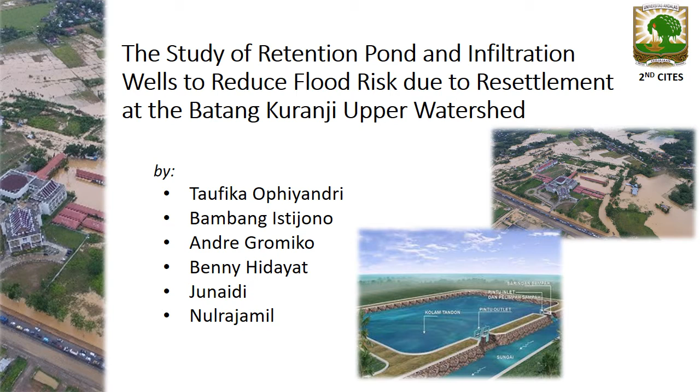This paper was also written by my colleagues, Bapak Bambang Istijono, Bapak Andre Gromiko, Bapak Benny Hidayat, Bapak Junaidi, and Bapak Nulrajamil. I divided this presentation into four sections. First is the introduction, where I will explain the background and objective of the paper, followed by its methodology. After that, we will discuss the result that we obtained from the research, and finally

The background of this paper is that in recent years, the Batang Kuranji watershed has experienced significant development, especially after the earthquake on the 30th of September 2009. Since then, due to tsunami risk, a large number of communities near the coastal area, which is the downstream area of the Batang Kuranji watershed, began to move to the upstream area. As a result, there has been significant change in land cover at the upstream area.

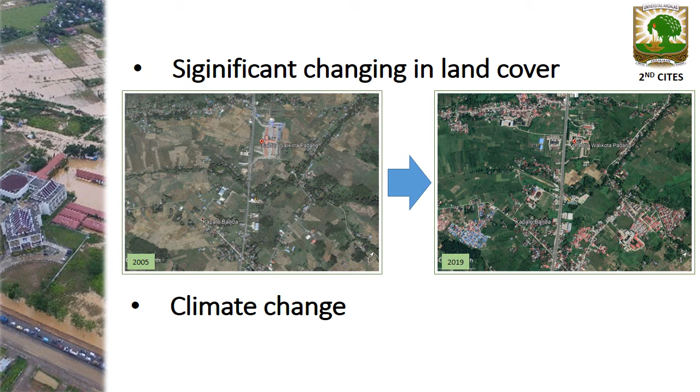As you can see from the left photo, in 2005, the area was mostly rice fields. Buildings were still very rare. But in 2019, due to development of infrastructure such as office buildings, roads, houses, and schools, the green area for water infiltration has reduced significantly. This condition is exacerbated by climate change. Thus, the peak discharge of Batang Kuranji might increase.

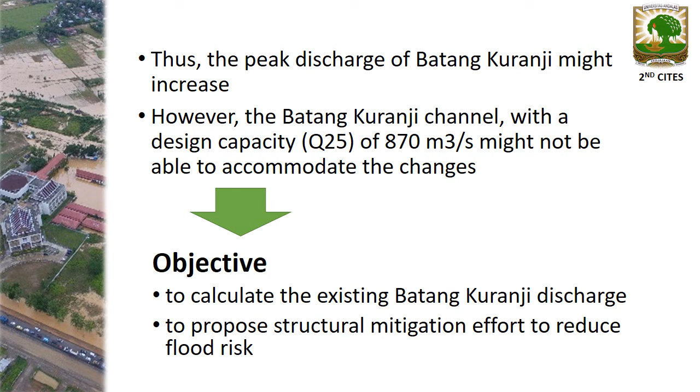However, the Batang Kuranji channel, with a design capacity of 870 cubic meters per second, might not be able to accommodate the changes. So the objective of this paper is to calculate the existing Batang Kuranji discharge and to propose structural mitigation efforts to reduce flood risk.

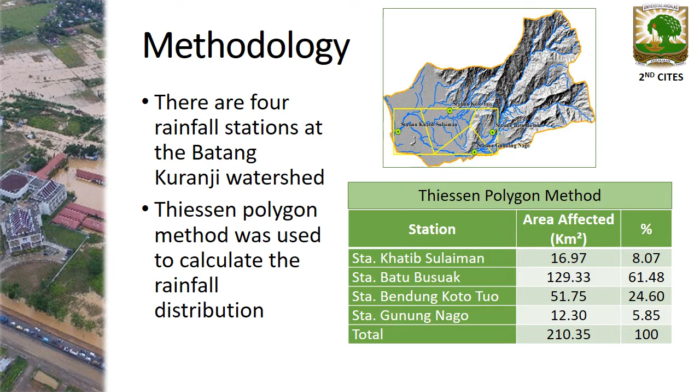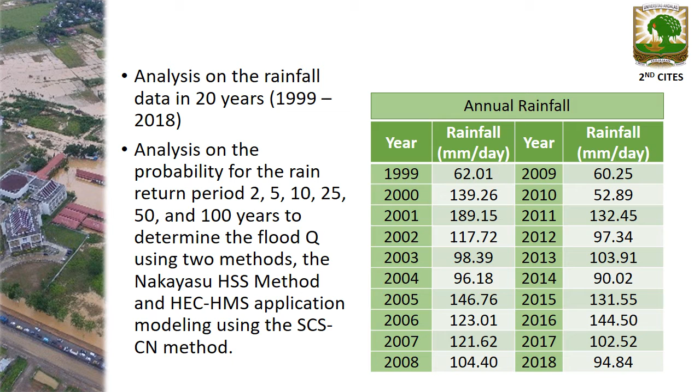The methodology we use for this research is: first, we calculate the rainfall distribution using the Thiessen polygon. From the table on the right, you can see the percentage area of each rainfall station. We conducted the analysis on 20 years of rainfall data, from 1999 to 2018. Then we analyze the probability for rain return periods of 5, 10, 25, 50, and 100 years to determine the flood Q using two methods: the Nakayasu HSS method and HEC-HMS application modeling.

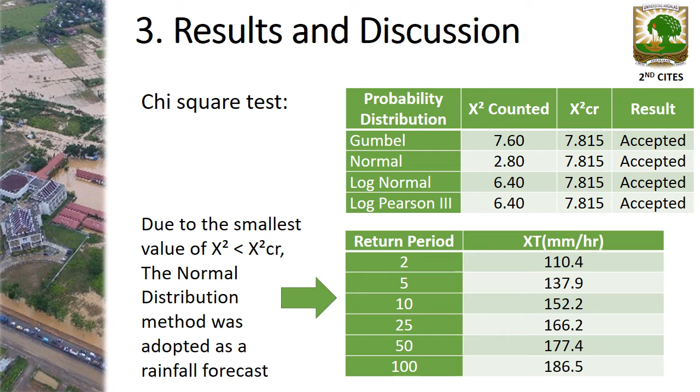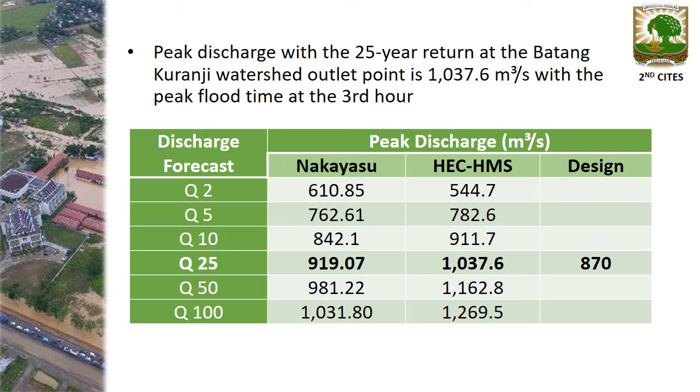So, as the result of the study, we found that normal distribution was the best fit to be adopted as a rainfall forecast. Then, we used two methods, the Nakayasu method and the HEC-HMS method, to calculate the discharge of Batang Kuranji. We found that the peak discharge using the Nakayasu method was 919 cubic meters per second and 1037 cubic meters per second for HEC-HMS, while the design for the Batang Kuranji channel was only 870 cubic meters per second.

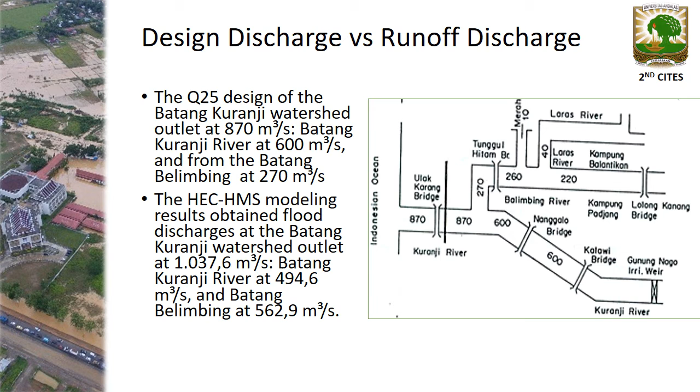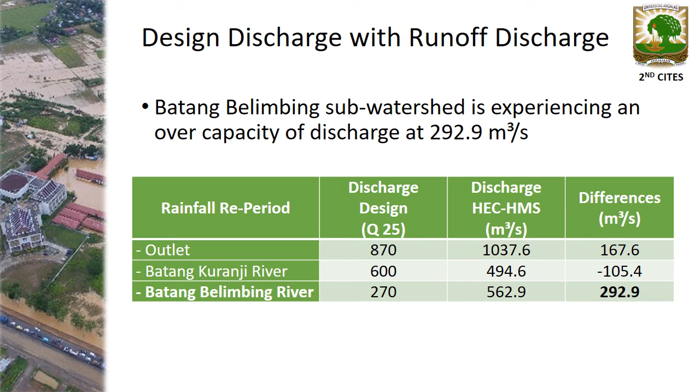So, if we compare the design and runoff in this chart, as can be seen from the picture on the right, the design discharge at the subwatershed is 600 for Batang Kuranji and only 270 for Batang Belimbing. Then, we found that the existing peak discharge at Batang Belimbing was higher than designed. From the table below, we can see that the Batang Belimbing subwatershed is experiencing an overcapacity of discharge of 292.9 cubic meters per second. So, flood risk measures have to be taken.

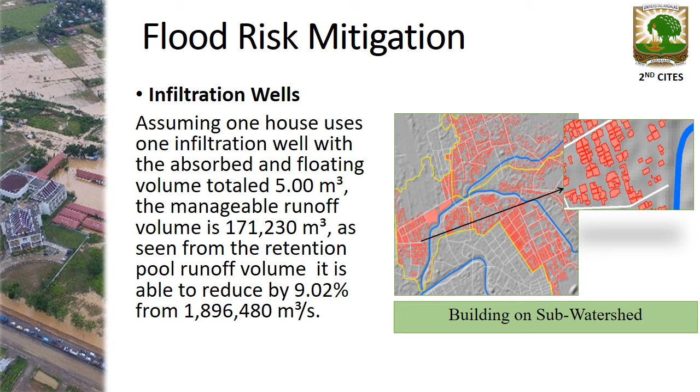In order to reduce flood risk, we propose two methods for structural mitigation. First, so-called infiltration wells. By assuming one house uses one infiltration well with an absorbed and floating volume totaling 5 cubic meters, the manageable runoff volume is 171,000 cubic meters. As seen from the runoff volume, it is able to reduce it by 9.02% from 1.8 million cubic meters.

Secondly is by creating retention ponds. The remaining volume after deducting the infiltration wells is about 1.7 million cubic meters. There are actually several potential places where we can build retention ponds. One is the area next to the mayor's office. The area is 35 hectares, so by digging 5 meters, we can create about a 1.75 million cubic meter retention pond.

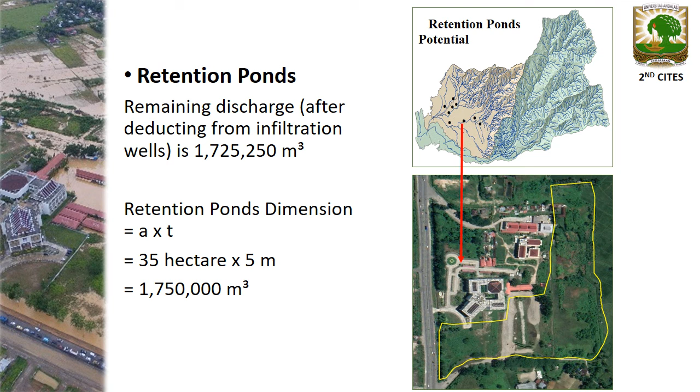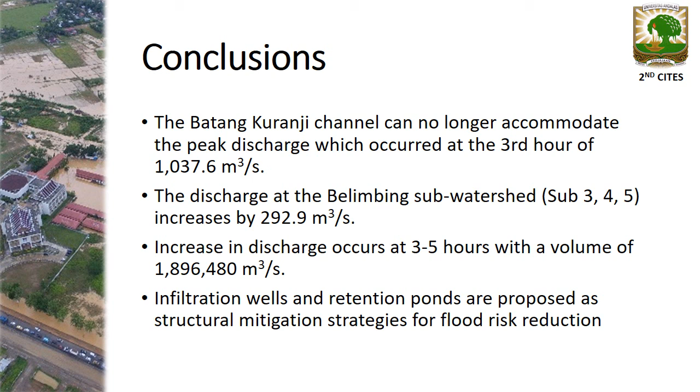We can conclude that first, the Batang Kuranji channel can no longer accommodate the peak discharge of 1000 cubic meters per second, which occurs at the third hour. The discharge at the Belimbing subwatershed increased by 292.9 cubic meters per second. The increase in discharge occurs at 3 to 5 hours with a volume of nearly 1.9 million cubic meters. And finally, infiltration wells and retention ponds are proposed as structural mitigation strategies for flood risk reduction.